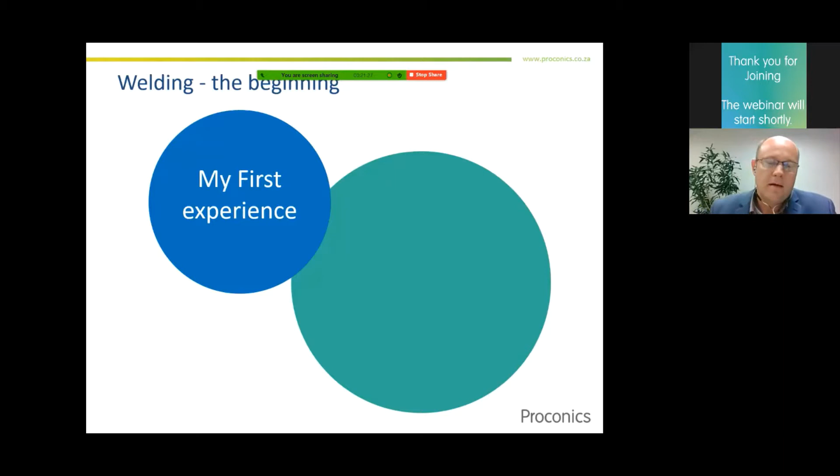First of all, I want to share my first welding experience with you. I started as a boilermaker apprentice in Polifin in Sasolburg. My first welding experience - the first time I took a welding electrode in my hand, closed my welding helmet, and struck my first arc - I knew I was hooked, as I couldn't get my electrode to release my test plate. This was my first sticking experience, as they would say in welding terminology.

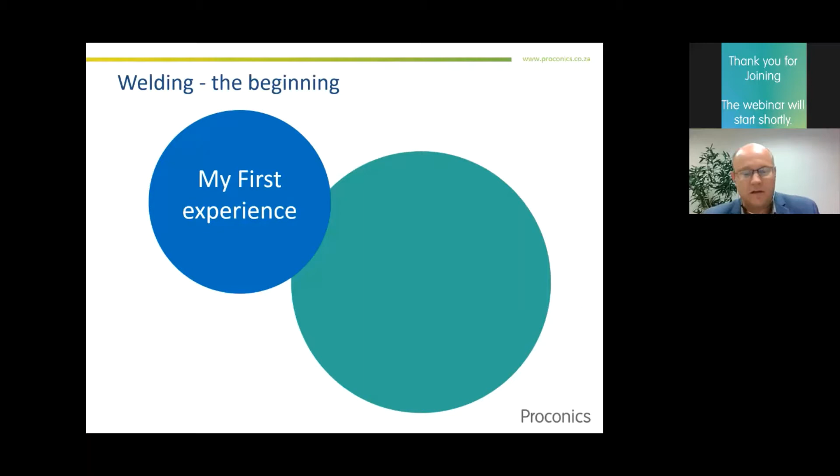Secondly, I want to show you a short introduction video on the most commonly used welding process, which is shielded metal arc welding, or in the British norms, manual metal arc welding, or as most of you would know it, plain stick welding.

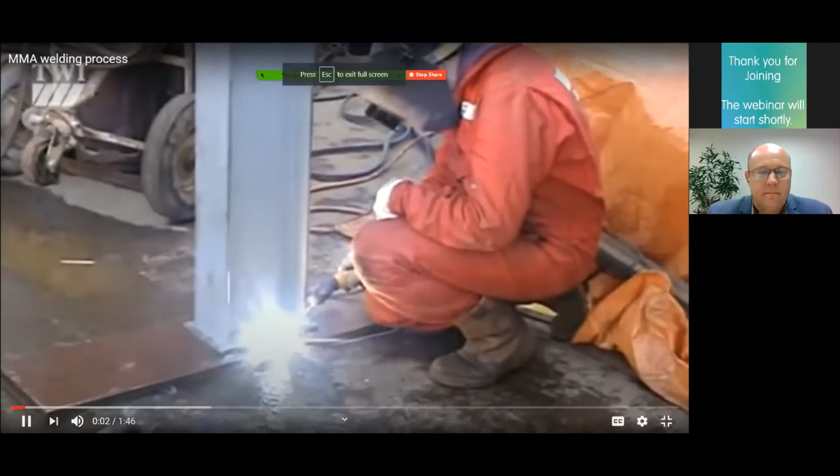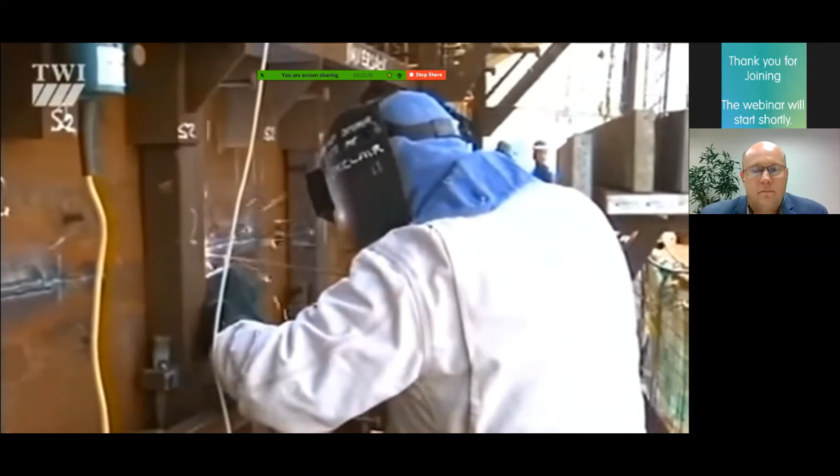Manual metal arc: invented in Russia in 1888 and known in the States as shielded metal arc welding, or SMAW. It's the most versatile of arc processes, suitable for welding most ferrous and non-ferrous metals over a wide range of thicknesses. It can be used in all positions with reasonable ease.

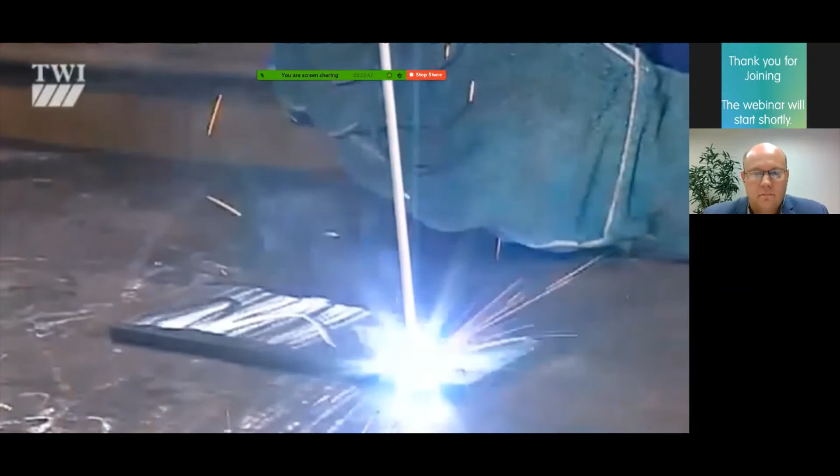When an arc is struck between the coated electrode and the workpiece, they both melt at the surface to form a weld pool. The average temperature in the arc is 6,000 Celsius. The job of the flux, which melts instantly with the electrode and the parent metal, is to form gas and slag, which protects the weld pool from oxygen and nitrogen in the surrounding atmosphere.

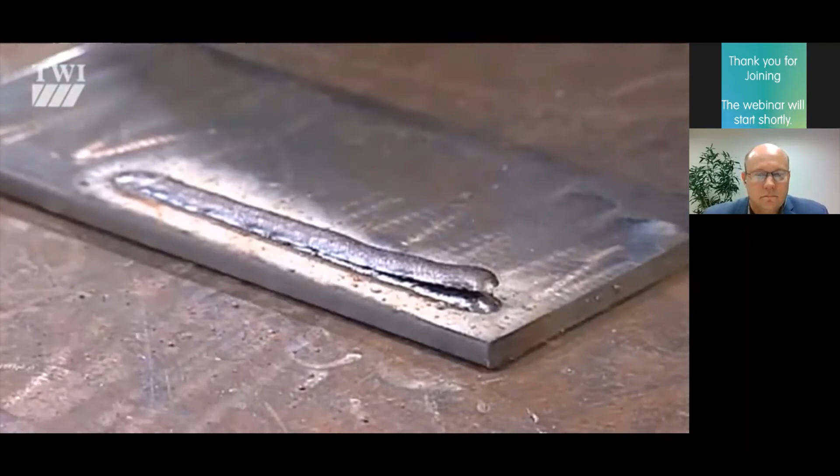After welding, the slag cools and solidifies and has to be chipped off. The process allows only short lengths of weld to be produced before a new electrode has to be inserted into the holder.

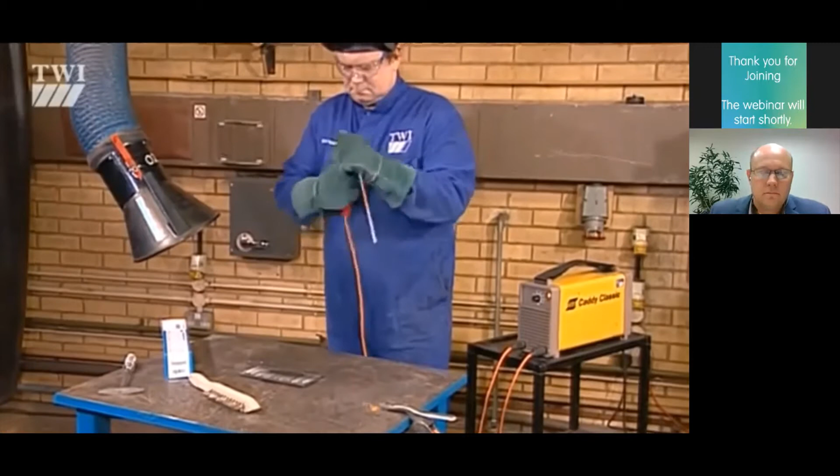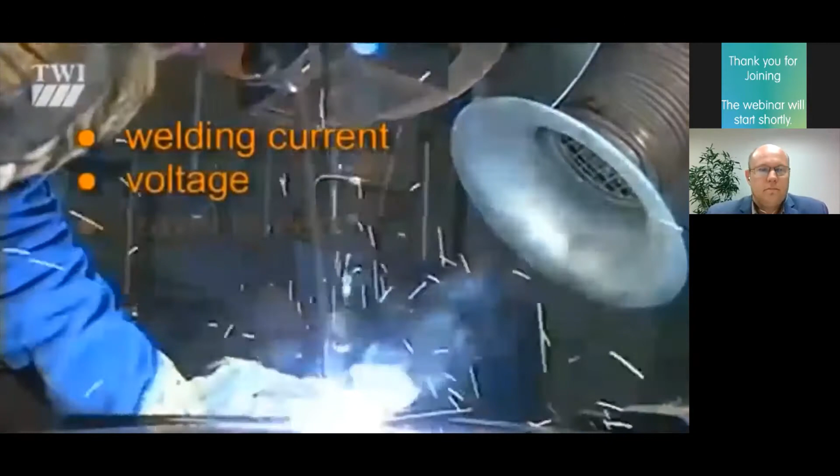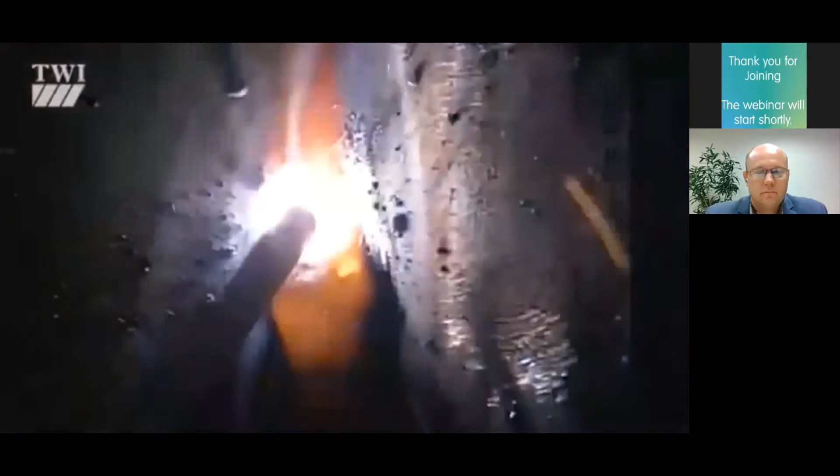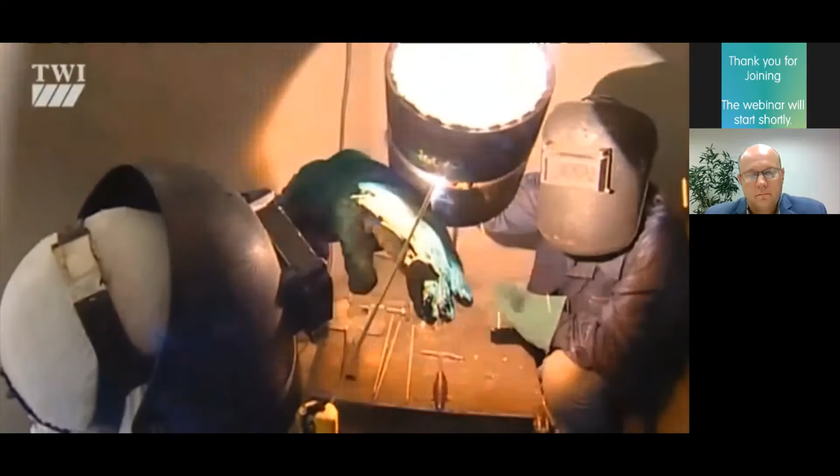The variables which affect the final quality of the MMA weld are current, voltage, travel speed, polarity, and electrode type. So, among the pluses, MMA is ideal for field or workshop use. The kit is very portable and simple, and the process is all positional. On the downside, it requires a high skill factor, it's susceptible to slag inclusions, and it generates lots of unwanted fume.

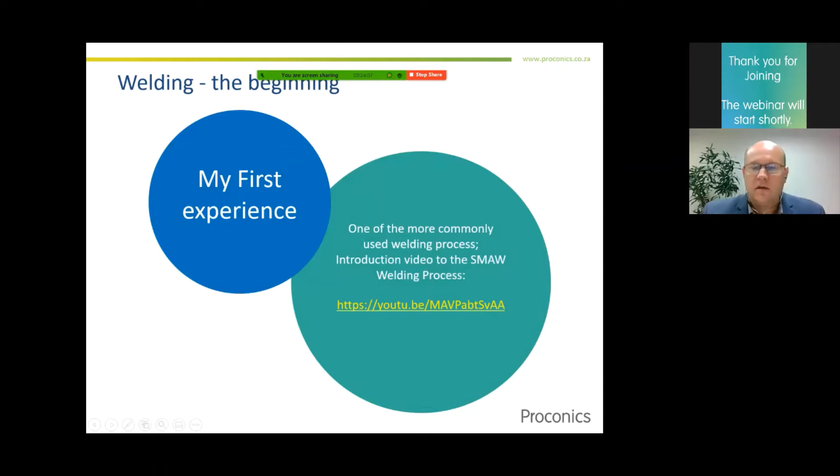So as you guys would have seen now in this video, the welding process is not so easy if you try it for the very first time. So this is what you want to avoid and improve on.

You can produce sound welding from these ones. There's a lot of essential variables that you have to take into consideration. This is just to mention a few of them. If your amperage is too low or too high, your arc is too long or too short, and your travel speed is too slow or too fast, this will all affect a bad weld.

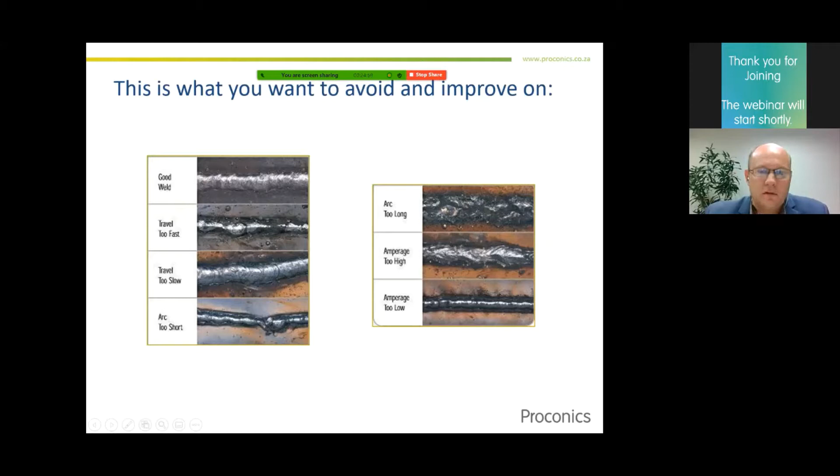So finally, if you have all these essential variables and obtain the training, you will be able to produce a sound weld. So on this slide, by being certified to ISO 3834 standard with all the quality systems and measures in place, you would be able to produce a weld like one of these in these two photos that you've seen.

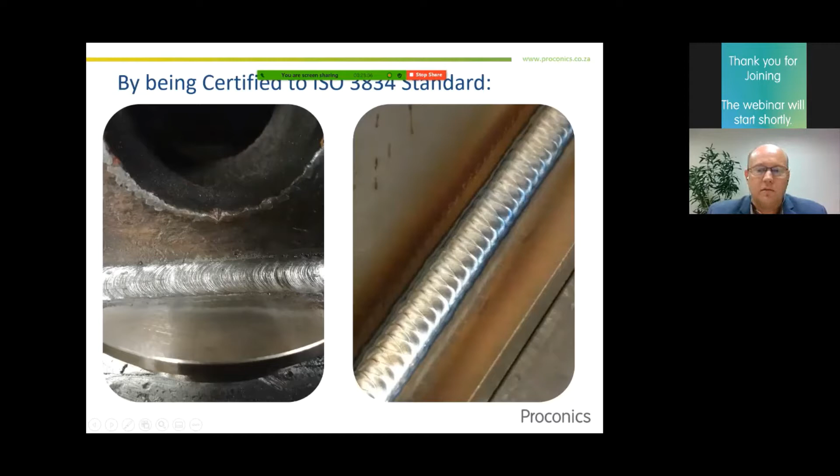So introduction to ISO 3834. This is an extraction out of ISO 3834 part 6. Welding is a special process. The quality of a weld is manufactured into the product and not inspected. This means that welding normally requires continuous control or that specific procedures to be followed, or both.

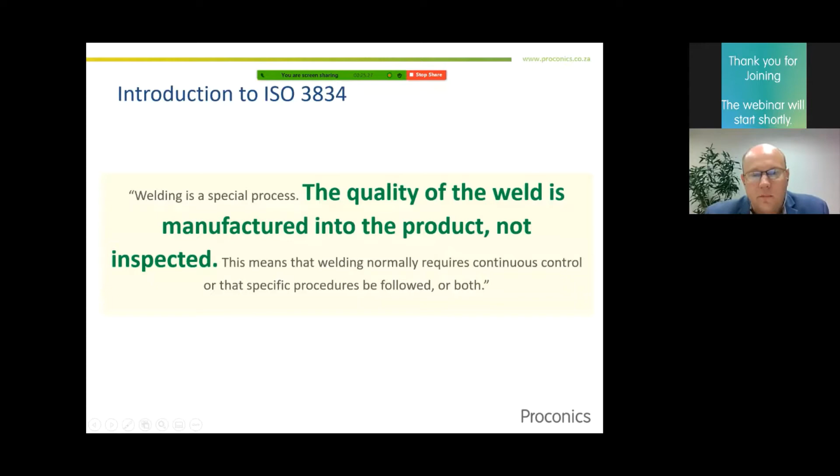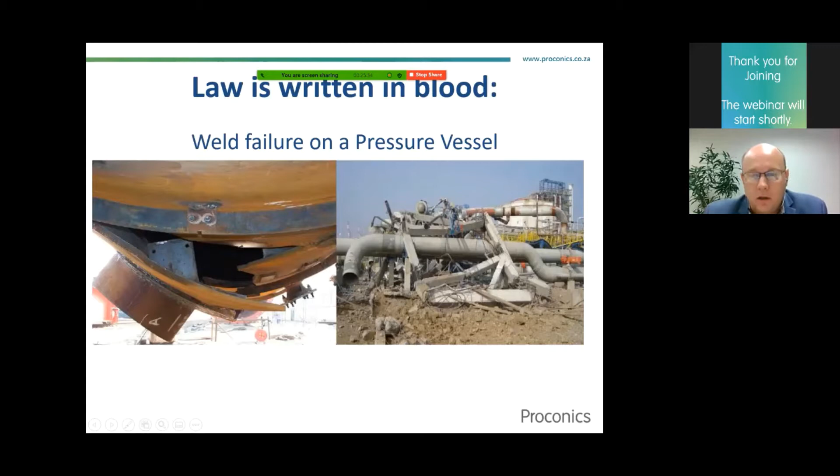So law is written in blood. The reason for this is that laws and standards are based on past experiences and failures, and possibly fatalities of human lives. As you would see in the picture on your left-hand side, this is a vessel that erupted due to weld failure and caused the whole process plant to collapse and also caused fatalities.

So weld failures don't only occur on pressure equipment, it could also occur on structural components. As you would see here, this is a failure of a structural weld that could cause a whole structure to collapse and also take human lives.

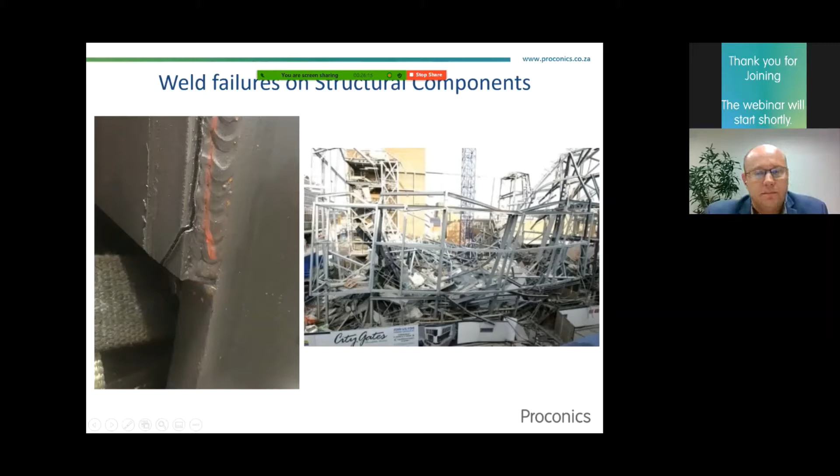So the typical situation in South Africa with regards to ISO 3834 is you have to comply with the local legislations, which then refers you to the Occupational Health and Safety Act. And then for the pressure vessels industry in South Africa, you have to comply with the PER, which is the Pressure Equipment Regulation. That also refers you to SANS 347, which is the categorization and conformity assessment criteria for all pressure equipment during the manufacture, modification, or repair of pressure equipment.

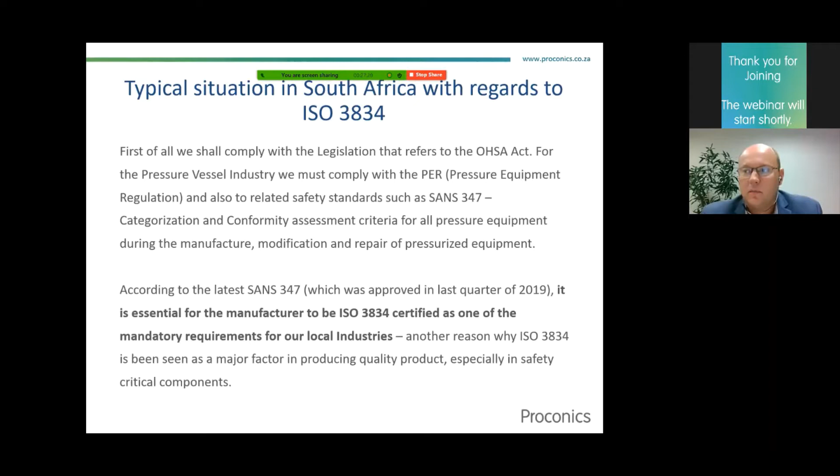It is also essential for the manufacturer to be ISO 3834 as one of the mandatory requirements in the local industries in South Africa. Another reason for ISO 3834 is producing a quality product, especially when it comes to safety critical components. So for hazard categories 2, 3, and 4, in accordance with SANS 347, it normally requires the manufacturer to be certified to 3834. It also has involvement on the module of inspection that needs to be applied. So if you have the certification in place, the AIA involvement is less.

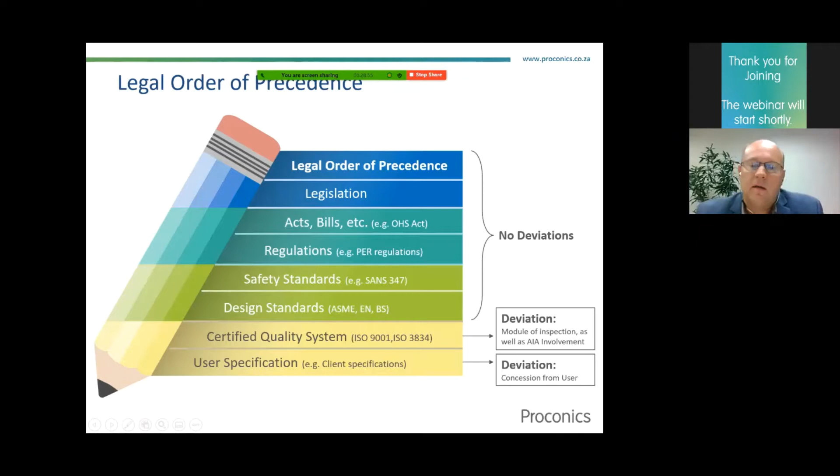On the certified quality systems, if you do not have these in place, it will increase the module inspection as well as the AIA involvement. For user specification, you're allowed to deviate only by means of concession, and only with acceptance from the client you might proceed to deviate from this.

Why ISO 3834 certified company? The reason for certified quality systems is to build trust. Now, trust consists of a few elements as listed here below: reliance, sincerity, competence, credence, assurance, commitment, and integrity. We put controls and measures in place to ensure that we deliver a compliant final product. It is also important to continue building trust with your client. If we follow and maintain our quality systems, we create a culture to deliver a constant quality product every time.

So benefits of implementing ISO 3834: quality assurance to improve the welding quality, management assurance that quality requirements will be met, compliance with construction requirements from the client. You want to improve service levels and skills within your company, and then deliver a final quality product.

So reasons for being certified to ISO 3834 is cost, time savings, and safety. First of all, you want to reduce repairs and reworks. Rework can cost the manufacturer up to 5 times the initial cost of production.

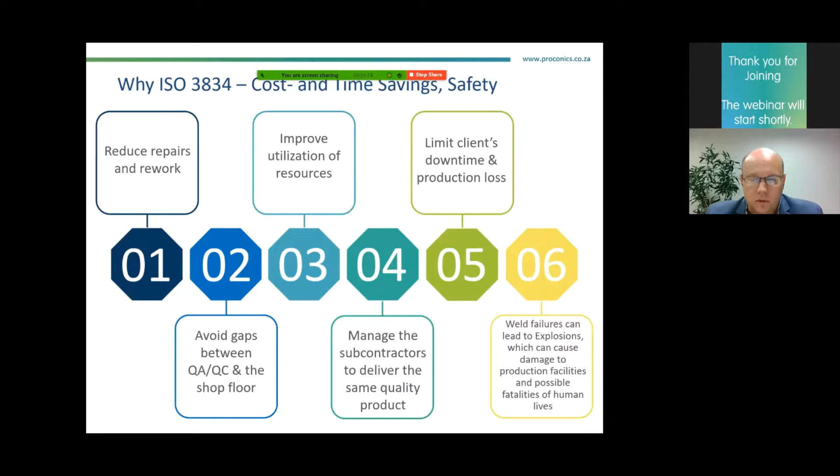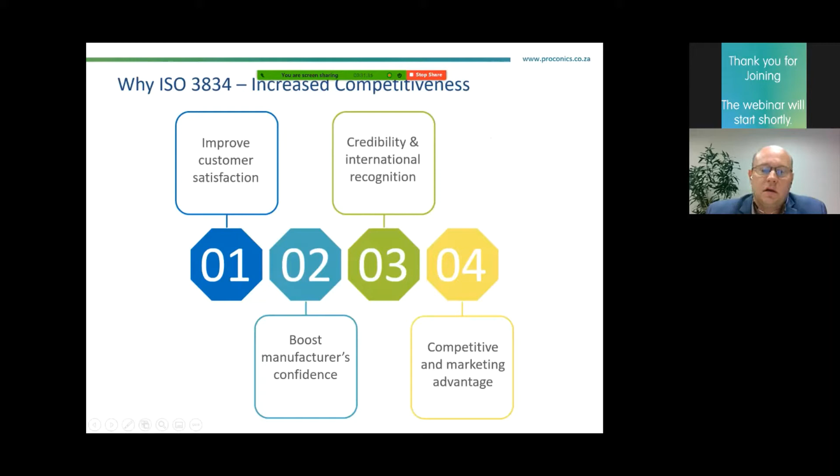Another reason for getting certified to ISO 3834 is for increased competitiveness in the market. First of all, you want to improve customer satisfaction. You want to boost your manufacturer's confidence, credibility, international recognition, and then competitive marketing advantage.

So why promote compliance to ISO 3834? What we believe in doing: first of all, you want to improve quality and safety of a welded product. This will increase your level of competency within your company. Then you want to build quality into the product and not via inspection. You want to better your welding quality during the manufacturing process and not after.

And then you want to maximize use of local industry in domestic projects and maintenance programs. As most of you would know, most of the process facilities are more than 30 years old, and failures tend to rise. And then finally, we want to improve our credibility in export and local markets.

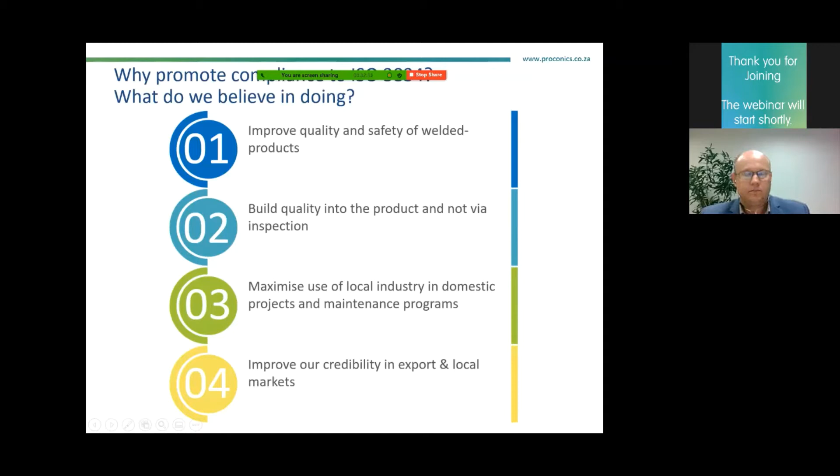So inspection and testing method: visual and NDT examination. Visual examination is the most extensively used non-destructive examination method. So if you look at the picture on the top left, you will observe that there's blatant visual defects, as there's arc strikes across the plate, as well as the paint was not cleaned around the welding area, so possible more defects will be observed in this area.

On the picture at the top right, you will observe that there's a lack of fusion, a defect at the bottom of the weld, which is not visible to the surface. To pick up these type of defects, you will have to conduct non-destructive testing. The two most commonly used methods to detect this defect is radiographic testing as well as ultrasonic testing. It all depends on the thickness of the material.

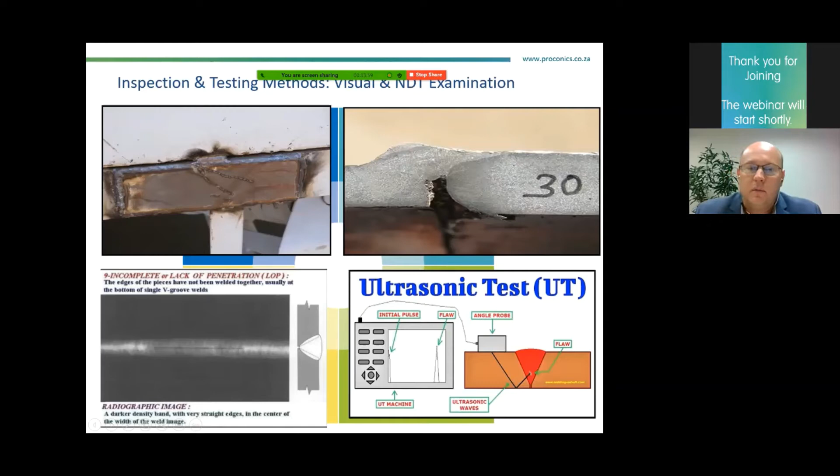So rework and retesting will have to be done on this weld. This means additional cost, which is not allowed for initially. So for the rework, you will have to remove the weld. You have to conduct NDE to ensure that you have sound metal again, re-weld, and then conduct the same method of non-destructive testing that picked up the defect initially.

So as part of ISO 3834 and fabrication standard, qualified procedures and qualified welders need to be in place. This is to ensure that sound welding can be produced.

So in the photos below, you will observe that on the top left, these are two bend tests conducted to qualify a procedure qualification record in accordance with ASME section 9. On the top right, this is a sample for standard testing to qualify the procedure qualification record in accordance with ASME 9. It gives you the quantities of mechanical tests as well as the location samples to be taken.

The WQR stands for Welder Qualification Records. At the bottom left-hand corner, you will observe that there's two test pieces. The bigger test piece is to qualify the base metal range of the welder as well as process thickness. You also might want to qualify more than one process. Next to it, you will observe that there's a smaller diameter test piece. This is to qualify the minimum diameter of the welder.

On this one, you will observe that there's 4 weldments in this test piece. The reason for this is, in accordance with ASME section 9, the weldment to be tested needs to be 150 millimeters long. Then on your right bottom, this is a possible defect that can arise on a fillet weld.

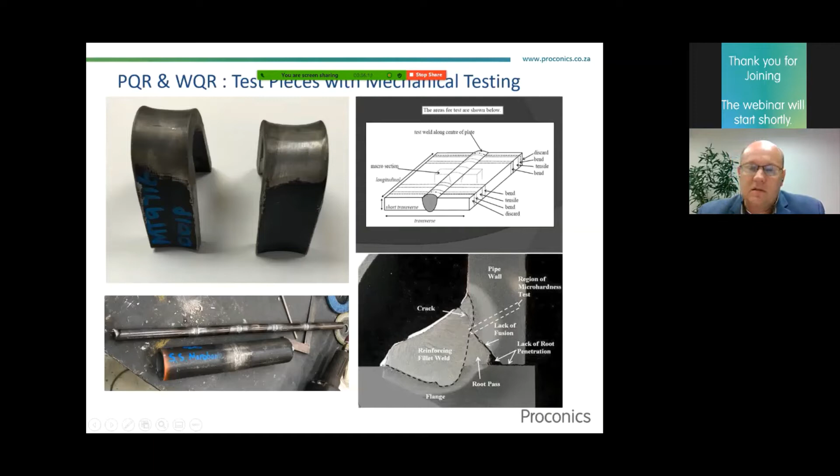So ISO 3834, welding fabricator certification scheme. What is ISO 3834? It is both welding related as well as actual weld related. First of all, it's a quality management system specific to welding processes and applicable to fusion welded metallic materials, independent of products manufactured. It's also a process control system to ensure weld integrity and the fulfillment of design intent. It also complements ISO 9001 but can be used as a standalone system.

Below is the checks and balances to deliver a quality product. You start with control, define, measure, analyze, and improve.

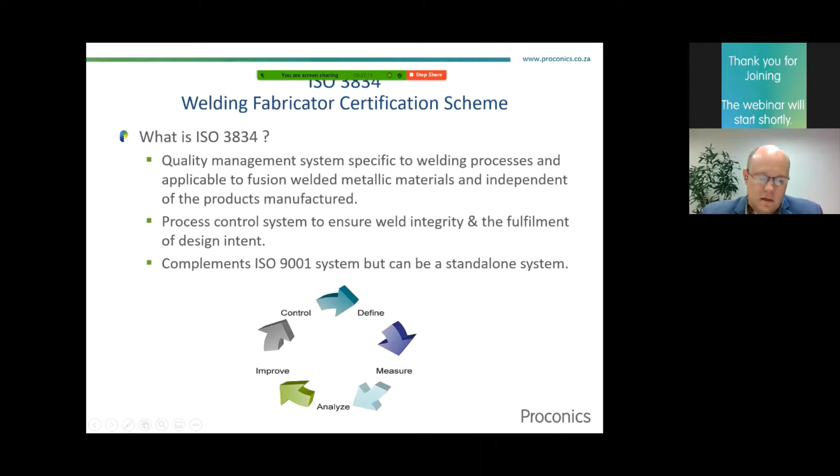And so the cycle continues.

The ISO 3834 system consists of 6 parts, which covers 3 levels of control. Part 1 is the criteria and selection of use for your company.

Part 2 is your first level of control, the comprehensive quality requirements. That's more for pressure equipment, pressure vessels, and pressure piping.

Part 3 is your second level of control. This is more for structures like bridges, which also have a high safety risk.

Part 4 is your final level of control, the elementary quality requirements. This is more for mass production, like the automotive industry, where the quality level is the least stringent.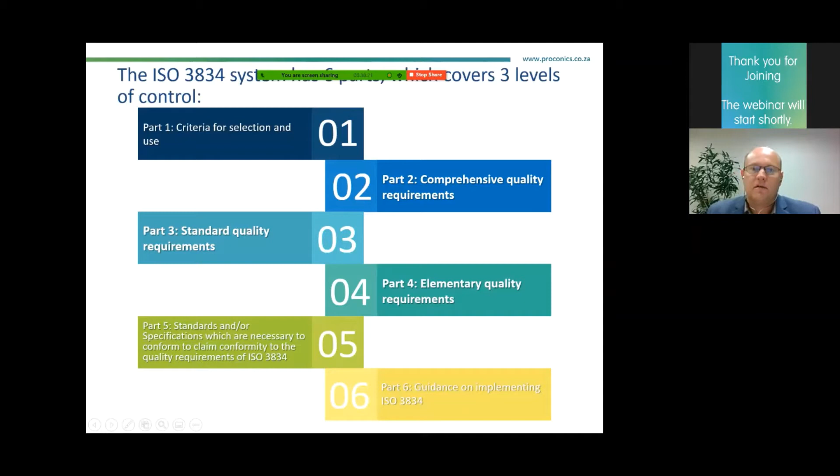Part 5 lists the standards and/or specifications which are necessary to conform and claim conformity to the quality requirements of ISO 3834. Part 6 is the guidance on implementing ISO 3834 within your company.

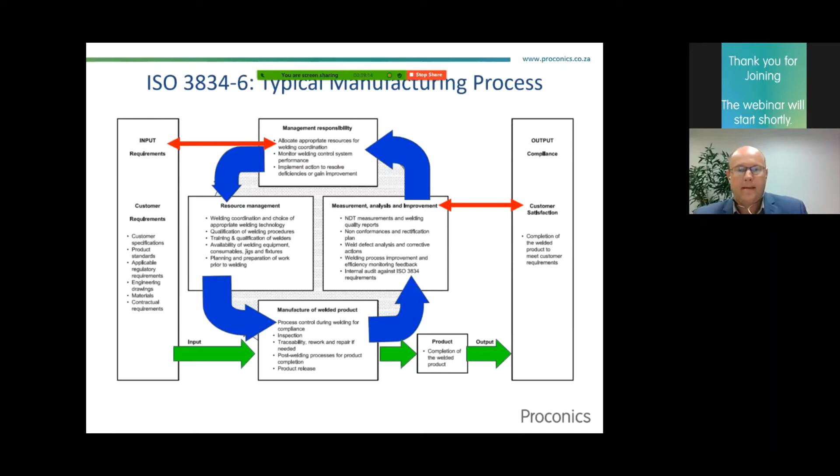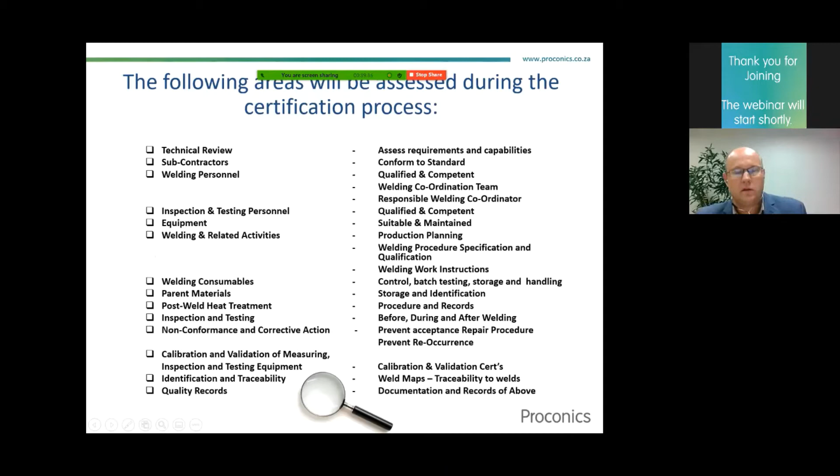ProGo was the first manufacturer to be audited remotely by the SAIW. ProGo's readiness survey was conducted in February, and due to the restrictions imposed by the COVID-19 pandemic, the SAIW proposed to conduct a remote audit. This was surely a new and learning experience for both organizations.

I hope this presentation was beneficial to you and that you were able to learn something from it. So if we can open the floor for some questions.

Freddie, we have one question already. The question is, where is the register found? It's from Mandla. I just don't know which specific register. Do you maybe know? Register, I'm not specified. If you can maybe define us more on the register that it requires.

What we can do is we can maybe allow Mandla to speak. Let's quickly see if that will make it better. Mandla, can you hear us? Attendance register, you can just unmute yourself. No, sorry, Elmarie, he's referring to the attendance register. Attendance, okay, oh. Okay, the attendance register we will send out afterwards via SAIMechE.